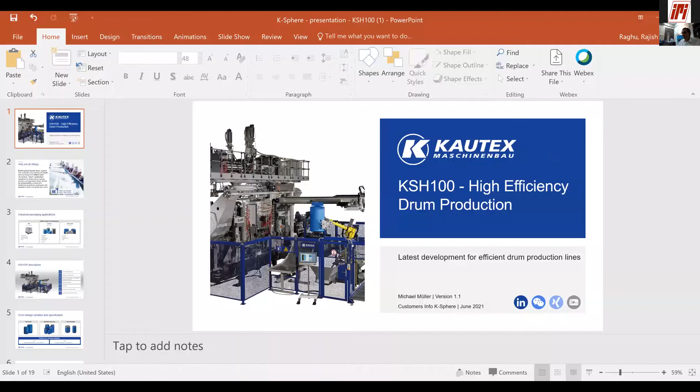So let me share my screen now. Sorry, is my screen visible in presentation mode? Yes, visible, we can see. Can I please interrupt? Rama, can you put the switch off all speakers? Because there's some disturbance on the background. Sandeep, can you mute everybody so we can hear properly?

Are you good to go? Yes, you can. Okay, so when we were invited to make this presentation, we were told that maybe we should present something relevant in today's COVID scenario. So we tried to come up with a topic based on feedback from our existing customers. During the COVID first and second wave, what our customers saw the most was disruptions in production, mainly caused by two reasons: one was the sudden and acute shortage of manpower, and the second was the sudden disruption in the supply chain of raw materials. This really had a big impact on the production schedule, which totally went haywire. So with that background, what we decided was...

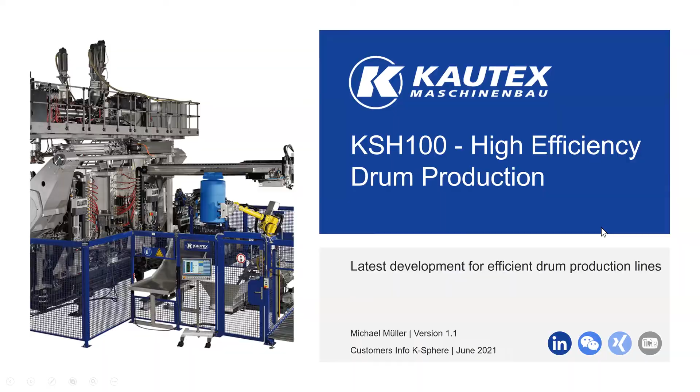Before I proceed, Kautex was given an introduction by Mr. Ramasamy and also Mr. Narayan, thank you very much for that. We are an extrusion blow molding machine manufacturer based in Germany with almost 80+ years of experience in manufacturing blow molding machines. We have been present in India since 2013, and that's when I also joined Kautex. I am basically a polymer engineer with specialization in plastics, and I am responsible for sales of the machine in India and neighboring countries, and also partially service to existing clients.

One of our main missions here is to actually work together with customers as well as suppliers, work as one with a common goal. So that's why we say: be one with customers and partners.

A product like the L-ring drum, we basically categorize into an industrial packaging application. For us, rigid packaging has two sides: one is consumer packaging, one is industrial packaging. Consumer packaging is basically your small bottles, shampoo bottles, toilet cleaning bottles, and industrial packaging products like jerry cans, drums, IBC, which are basically used in the lube oil industry, solvents, agrochemicals, chemicals, also in food applications. And of late, what we have seen is also semiconductor applications.

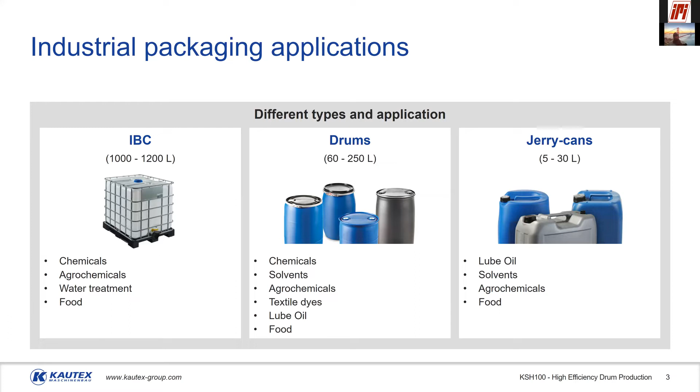For this particular product, which is an L-ring, we have a machine called KSH 100 - the 100 denotes the clamping force. We have the possibility of a single and a double station machine; I would touch upon this during the coming slides. We have possibilities with different layer configurations: mono layer, deco, or reco. Deco is decorative co-extrusion, wherein you have an outer layer for color and the inner layer for contact with your inner product. Reco is regrind co-extrusion, where it's a 3-layer structure wherein the middle layer is pumped with regrind material.

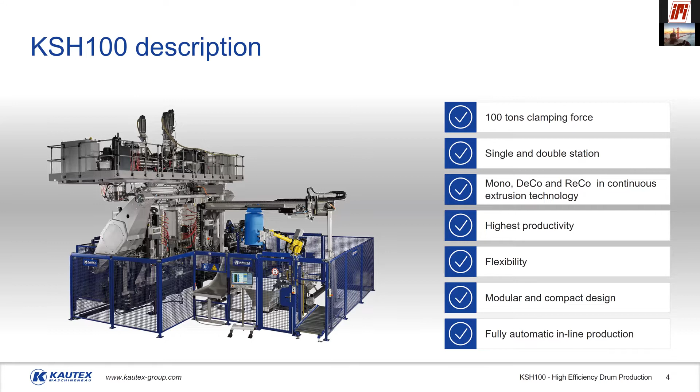There are also other topics here, which is automation, modularity, but I would cover these points in the coming slides.

When you look at drums, of course it's a very familiar product in this fraternity. We have a tight head drum, easily a 220 liter or 210 liter drum, which we also call an L-ring drum. It can be with 1 L-ring, 2 L-ring, or we have standard open top drums, which are more concave in nature, have a bigger opening, and are covered usually by an injection molded part. Or we have freely designed drums, which can easily be produced in the same mold producing the L-ring drum, but with an extended or bigger opening.

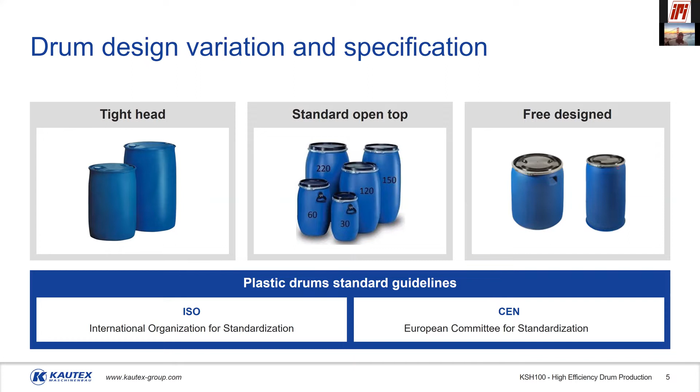When we are talking to customers, basically for our better understanding and for a successful project implementation, what we always focus upon is to have the right article design and dimensions. If the list of things I show here are clarified at the very beginning of the project, I think a lot of surprises, pleasant or unpleasant, can be avoided.

When you talk about article dimensions, we are talking about the diameter, height, what kind of weight expectations the customer has, and the raw material type. This is important because we have raw material suppliers, and there are some which are very common.

For example, Marlex, let's take. Then we have SABIC. Marlex is a very common grade here, but the advantage of using Marlex is we get a consistent quality product. We know this from the market, but the challenge is that this material is also very high in demand. So it's always good to know alternate suppliers, and also how this product will behave if we are using a different supplier, because at the end of the day, each material will have slightly different properties, which it will impart to the final product.

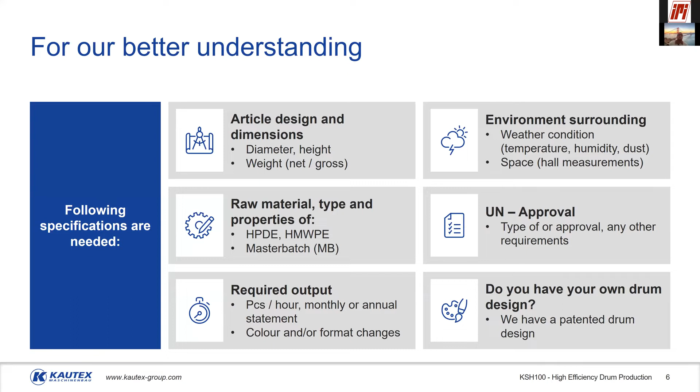Also, drum is a common product, but it's also a very old product. It's been existent in the market for many decades. So there are a lot of patents covering these drums. We have to make sure we are not encroaching upon any patent design. Kautex does support this, we have our own design which we can modify based upon your end customer's requirements. This is the Kautex design which we have a patent for, but it's also open, so we can share it with our customers without any royalty.

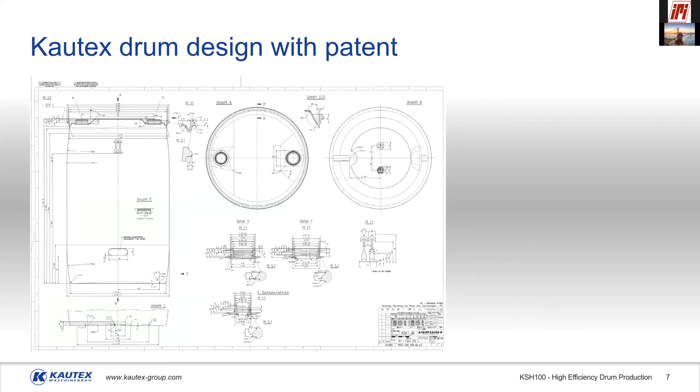Flexibility is going to be key when you are deciding upon a machine. In this case of KSH, apart from the clamp force, we have the daylight, the clamp stroke, and the mold platens, which define the kind of products you can produce. We have tried to keep these values in a range that can accommodate a lot of products which are similar in shape and size, as well as diverse applications.

So you have one extruder, which is in continuous extrusion form, feeding one clamping system and also the second clamping system. The idea of using two clamping systems is basically to see how we can make the output almost double - let's say around 90 drums per hour.

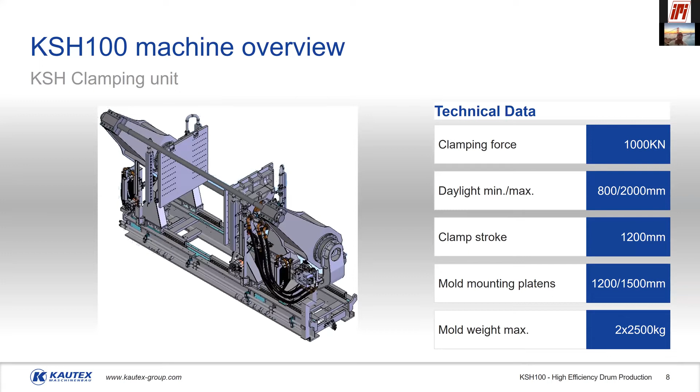Also, a lot of other critical factors are important when you're considering the drum. One possibility is that when you're talking about a double station or single station machine, what we are using is continuous extrusion. Traditionally, drums and a lot of big products are usually made by accumulator type machines. It's been a proven technology, and it's also still made in the market right now, so we still find some producers using this technology.

But our background in fuel tanks, where we were making continuous extrusion machines for 6-layer, 7-layer applications, clearly demonstrates that continuous extrusion is superior when it comes to final product wall thickness distribution, compared to an accumulator head machine. Also, power consumption wise, we find that a steady running extruder is always more efficient. These values show that co-extrusion with a continuous type head is far more efficient than an accumulator run machine.

The second challenge, or the optimization part of the machine, is that if it's under the die head, every time the mold closes and catches the parison, it has to move away so that the continuous co-extrusion can happen. But this means you are moving 30-40 tons of material, which is really a power guzzler.

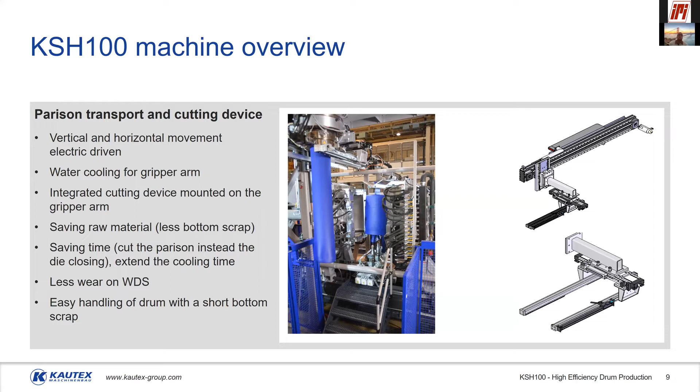It's also important that when we're running at a low cycle time or very high output, we have to see how we can best optimize the cooling performance of the mold. So we have a time required to get the shape, but the secondary cooling can be taken care of by the post-cooling stations. This is becoming more and more common, because the cooling and stabilization of the article is taken care of by the post-cooling station. The number of post-cooling stations entirely depends upon the kind of output you're looking at.

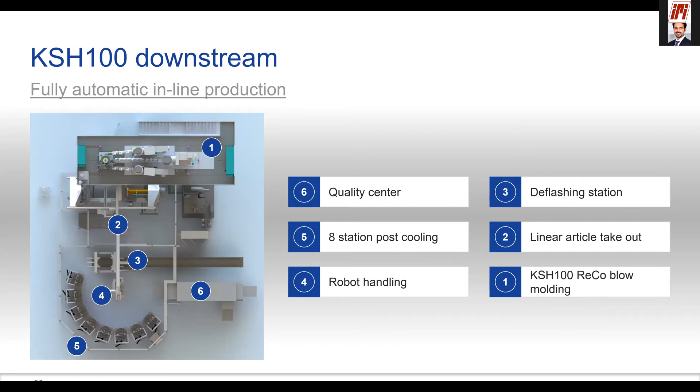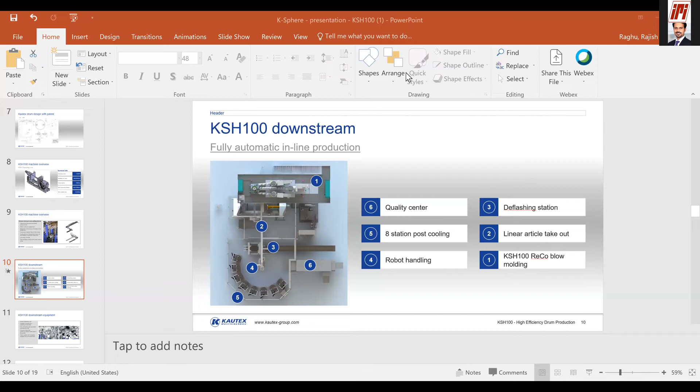Raghu, the video is not visible. Video is not visible, sir. Okay. Shall I start again? Yes, sir. Please. But do you see the screen of the video? No, sir. Only your last slide is seen. Is it? Okay. We didn't see the video. You have to stop this sharing and then reshare. Then only it will happen. Is it? Okay. Close this file and open again. Unshare and share. Okay, I'll try that. Does this change the screen? Yes, yes. We can see now.

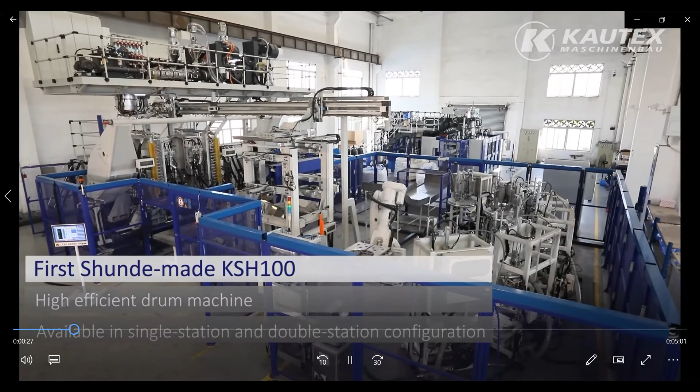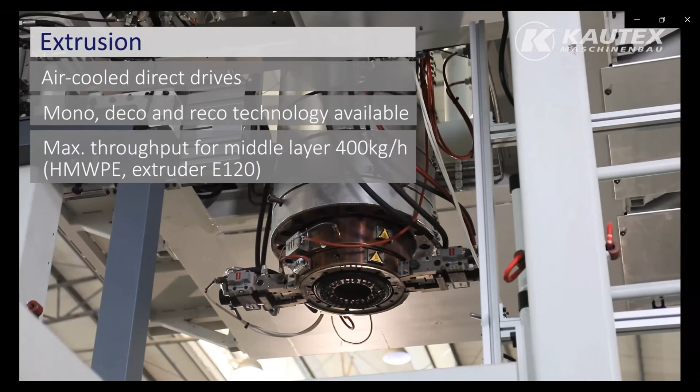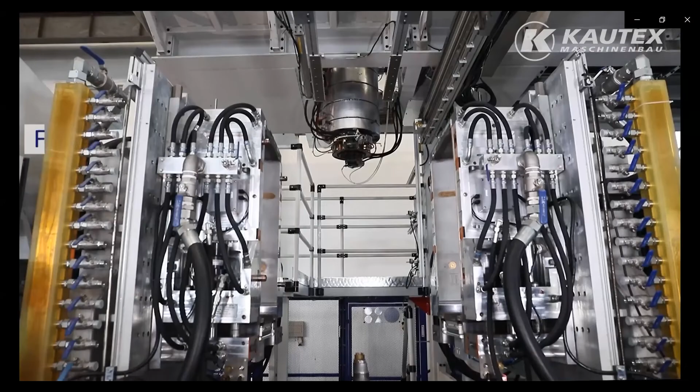So this is a KSH 100 machine along with the automation system. So we have the 3 extruders on the top, followed by the die head. In this case, the extrusion head is made by Kautex and it's called WVT 1350, with an output of 650 kg an hour. The mold design is again from the Kautex side.

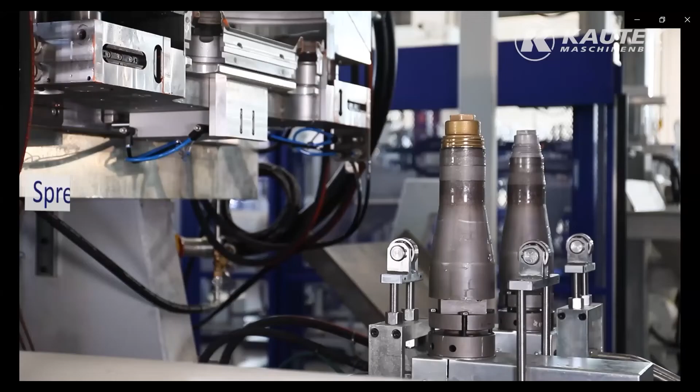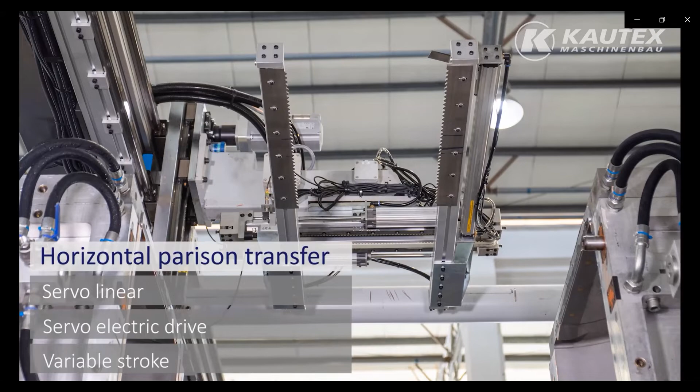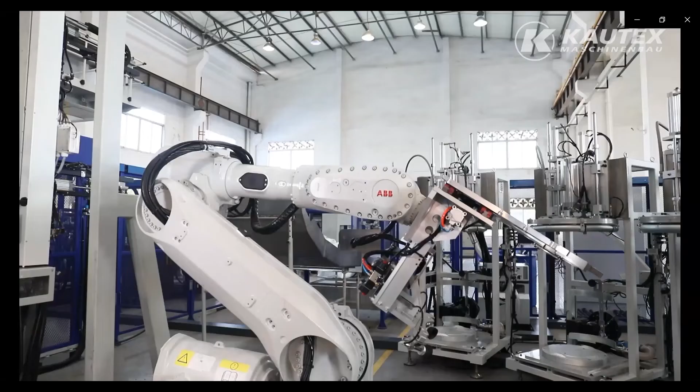So this is the article transfer, the takeout device that I was mentioning, and this is the deflashing station where you remove the flash. We have the 6-axis robot along with the cooling station.

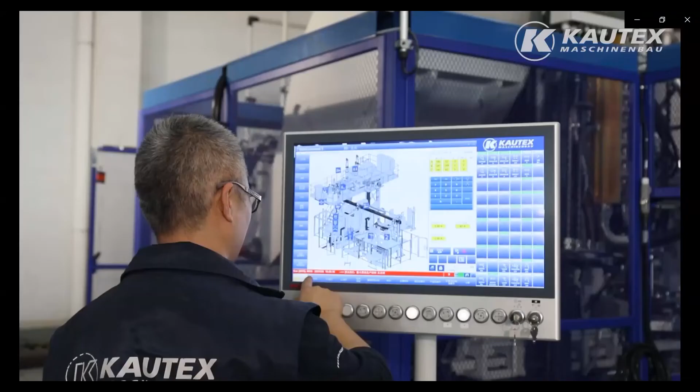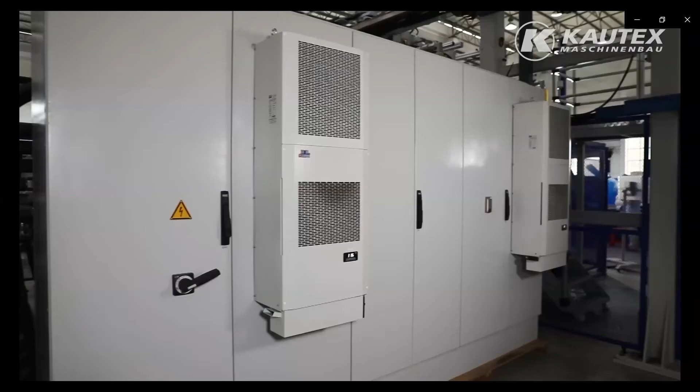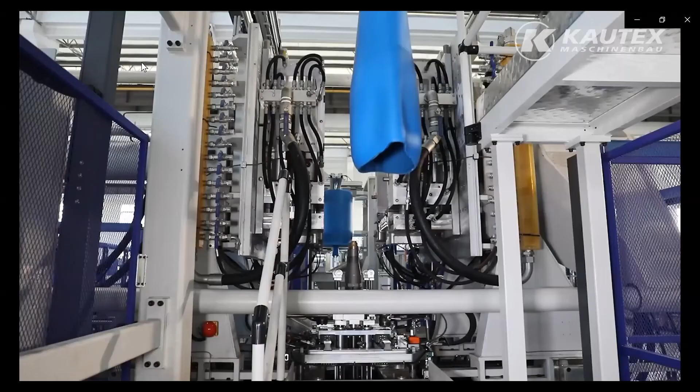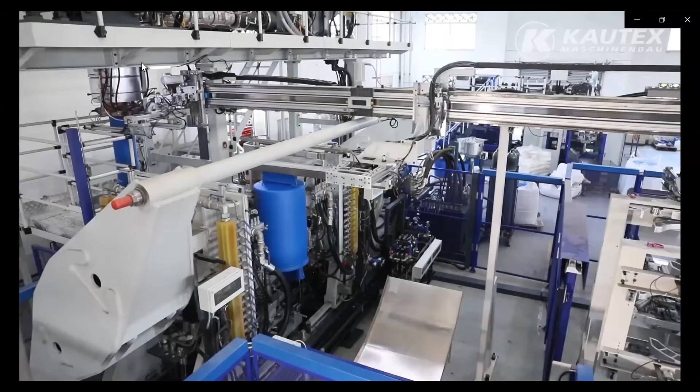This is our control system. It's a Beckhoff-based control system, and we call it Flow Command, where the software comes from Kautex in-house. So this is the concept of article transfer. The deflashing stage.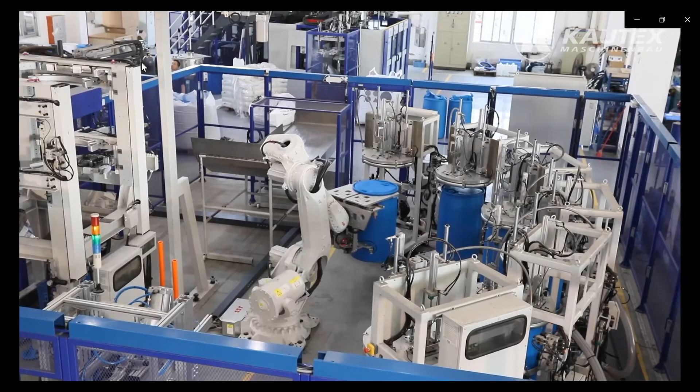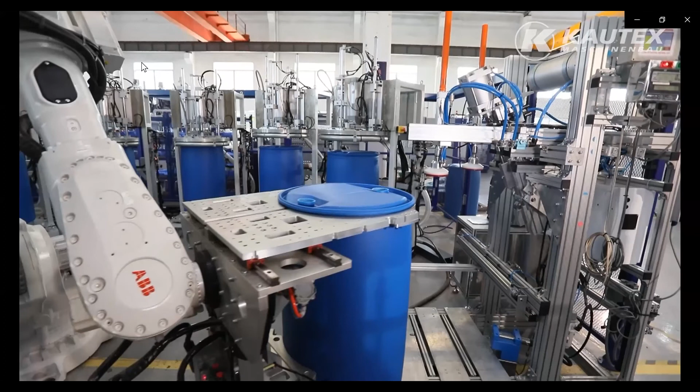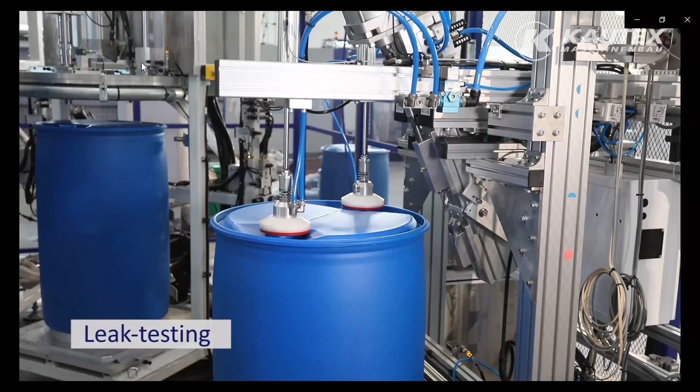So what we're seeing now is the post-cooling stations, where the cooling is given to the top and the bottom, and also circulation is done to the inside. Before the quality check, there is drain hole punching, where you have an extra hole to remove the water accumulated in case the drums are stored in, let's say, outer areas, and the waste cage.

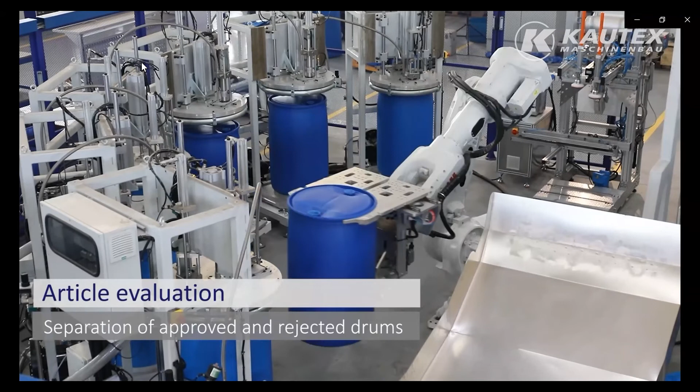For traceability, you have the possibility of printing a code with which we can trace back our production parameters. And you have the final article being...

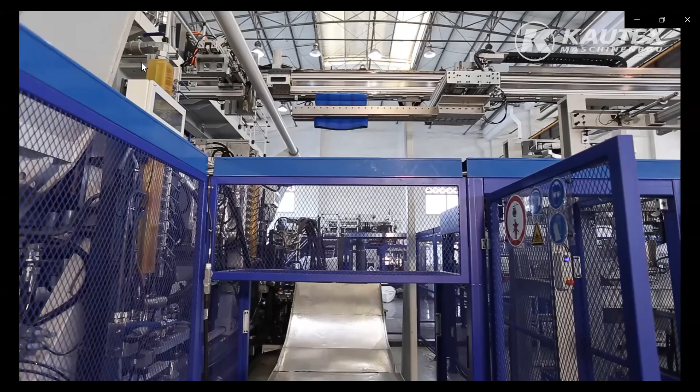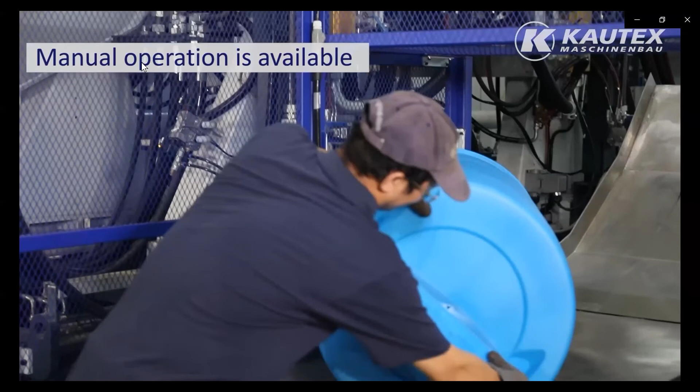But it's entirely depending upon the customer, because some customers don't want automation or they have their own in-house automation systems. So in that scenario, we can have a simple blow and drop, where you just drop the drum, and then of course you need a skilled operator who can remove the flash consistently without damaging the drum. So basically all the possibilities are there, depending upon what the customer actually needs.

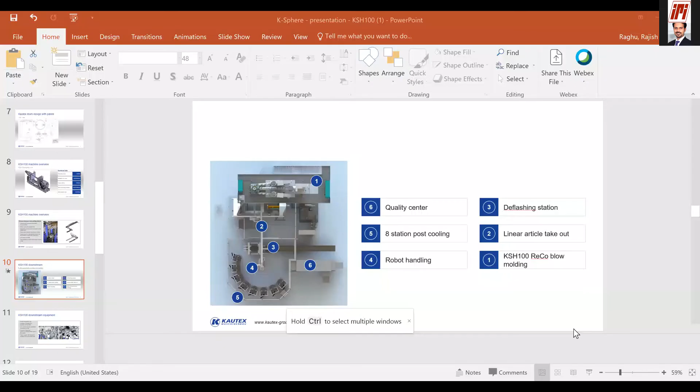Can you see my slides again? Yeah, we can see.

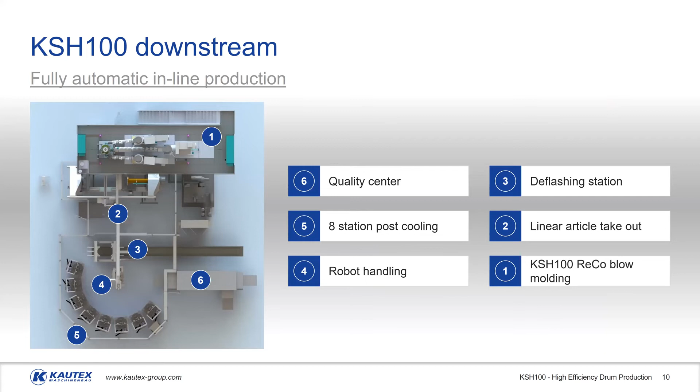So basically, I think we had covered this portion. So machine, yes. Mold, yes, a very important part. But what about downstream equipment? We have experience of working with suppliers over the years, and for some reason, we always found some kind of shortcomings, and then we understood, okay, why not take the advantages, understand the disadvantages, and try to come up with a one-stop solution where we also take care of the downstream equipment, like the deflashing, the end of arm tooling, the post-cooling stations.

And with that know-how, we did come up with something which we found was very innovative and was highly appreciated by the customer, because it was focused on the end product. For example, it was able to tear off flash in a more gentle manner without causing any kind of imperfections on the body of the drum.

You have the possibility of controlling everything with a single HMI. So basically with the Kautex HMI, you can control everything. And then you have the conveyor, which can transport the flash. So you can actually design the system based upon the exact requirement of the customer.

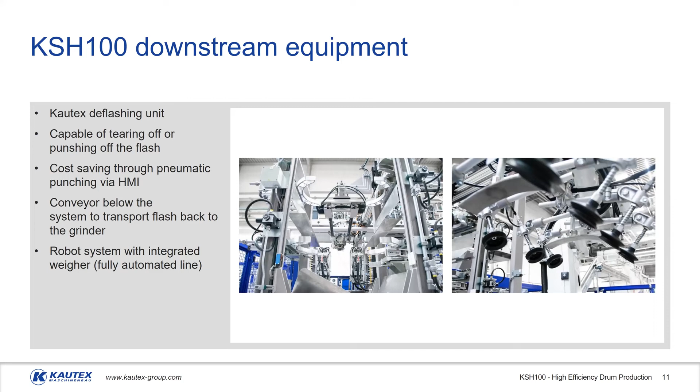Post-cooling station is also the same concept. We had experience with many suppliers, but then we found that, okay, we need to get the best performance. We need to dig in deeper and come up with our own solution. The advantages was that, of course, the solution was a little bit more efficient from what we were getting.

At the same time, for the customer, it meant that the customer is only talking to one person, because we are taking the entire responsibility since we are supplying this downstream automation. So basically 1 or 2 service engineers can take care of the entire service, entire line.

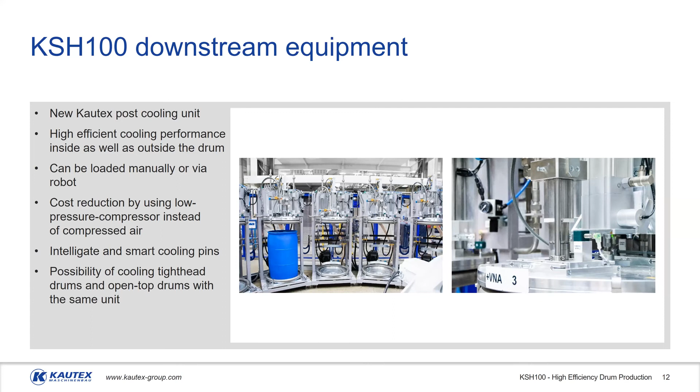But one of the also critical parts where Kautex comes into the picture is the melt management, the head design. With Kautex, we've been manufacturing our own heads for a very long period of time, and this know-how has really helped us to produce parisons which are actually without any kind of impurities, because we are not really having any kind of dead spots in the channels. We are making sure that there is no stagnation of material anywhere.

The design is optimized, so it's a spiral curve, which is of course not a new thing, but then you have to optimize the spiral curve in a way that there are no weak points anywhere. So sometimes it's a combination of heart and spiral curve, and we also have a lot of patents in this when it comes to head design.

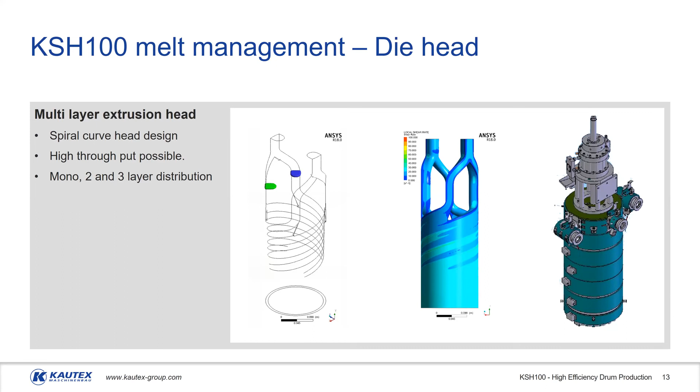So when you're looking at multi-layer, of course, this is one of the keys for saving not only, let's say, raw material, I would say specifically virgin raw material, and at the same time also saving master batch. Because you have a middle layer which you can actually run with high concentration of regrind material, PCR, or let's say cheaper grade material which is readily available in the market. Having said that, I think one of the critical points which we should also consider is to get a grade which is closely resembling the HM grade or HDPE grade.

We can also have the possibility of having a very thin outer layer, because the master batches are usually more expensive. Sometimes it gets a little bit more expensive, may not be in drum, but for other smaller applications where we are looking at pearly finish, gold finish, then these master batches cost really a lot of money. So the idea is to basically reduce the consumption of master batch by using the master batch only in the outermost layer. It has two advantages.

One, you are reducing the total quantity of the master batch used. But if you look at the percentage, maybe from 2% you have to increase the dosage to 4%. But then that 4% is only on, let's say, 15% or 20% of the total area which it was supposed to cover, because the outer layer is only in that range.

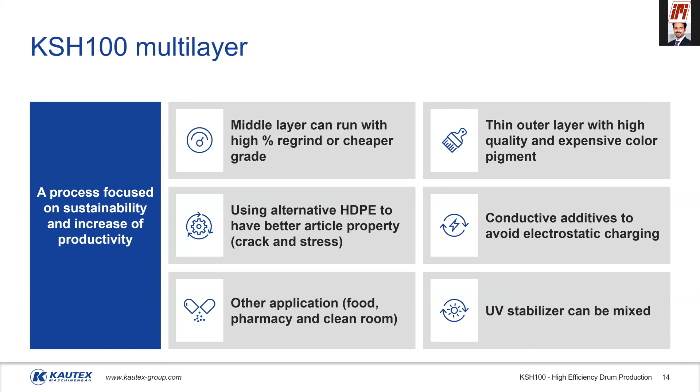This is a small table which highlights the cost advantages when you are using a 3-layer structure compared to a monolayer structure. In this document, we are looking at MB, which is the master batch. If you look at the extreme right, the light blue and the dark blue side, the percentage of master batch is increasing from 2 to 4%. But the consumption of master batch, which was 10 kg per hour, is reduced to 5 kg per hour with a 3-layer structure, which can further be optimized based upon your end requirement. That saving of master batch results in annual or hourly savings in your final product.

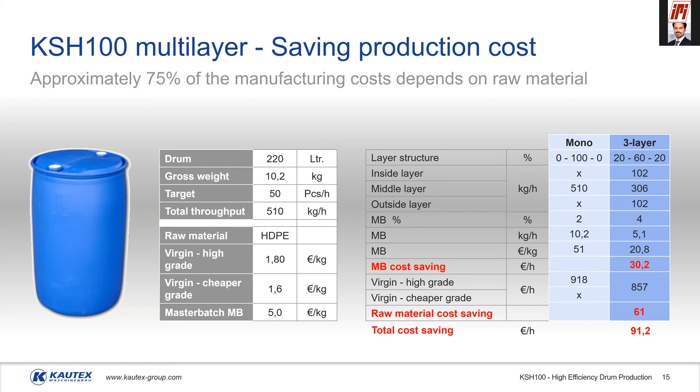So to summarize this multi-layer technology, you are reducing your production cost by reducing the consumption of master batch. This is not something new, but it is something we should really consider when making our investments. Also, a good extrusion system makes sure that we have a very consistent melt homogeneity, which results in a very uniform wall thickness distribution. This uniform wall thickness gives you much better properties compared to other solutions, so you have a chance of producing your drum at a lower weight. This multi-layer concept is more sustainable because you have the possibility of running a high percentage of regrind.

End users or our famous brand owners in this country or worldwide are all promoting the use of PCR, and they all want to project their bottles as green bottles by increasing the PCR content. I think this will be more and more relevant in the coming days. We are reducing the usage of master batch, which again makes the solution more sustainable. Weight reduction possibilities are there, and you have very high product quality with uniform melt homogeneity. And like I mentioned, for food applications with low migrations, this is an optimum solution because you have an inner layer which totally encapsulates the product filled inside from your regrind layer.

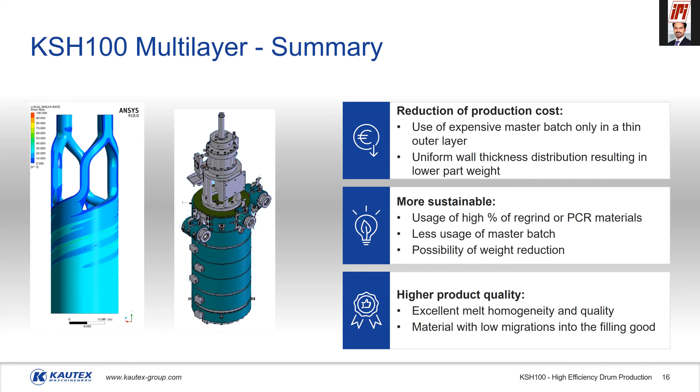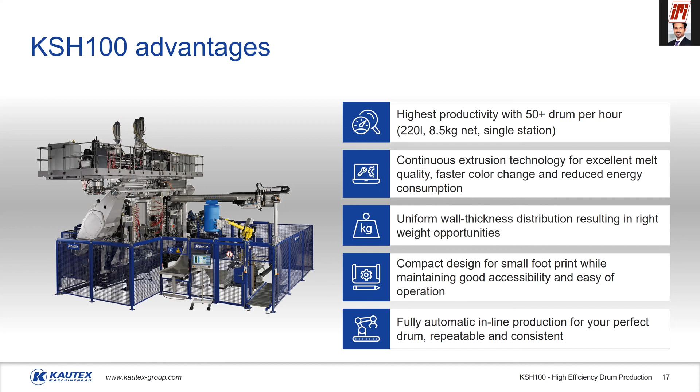So this is what we had compiled for this presentation. We hope you find this useful.

It was really a pleasant experience giving this presentation in front of this esteemed audience. I saw a lot of veterans from the industry, so it's an honor for us to present in front of this team. But I also have to apologize that I won't be able to spend too much time in this meeting because I have a housewarming going on at my place. So I have to go back. My family is waiting. My guests are waiting.